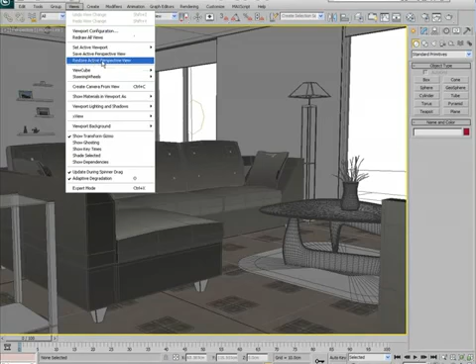So what we're going to do is take this scene and we're going to see how we can add a Final Gather to the global illumination in this scene. So let's go ahead and let's do that now. The first thing I'm going to do is come up here to the views menu. I'm going to hit save active perspective view so I can save out this view. Now if I go ahead and have a look, I can always restore the active perspective view and come back to it later.

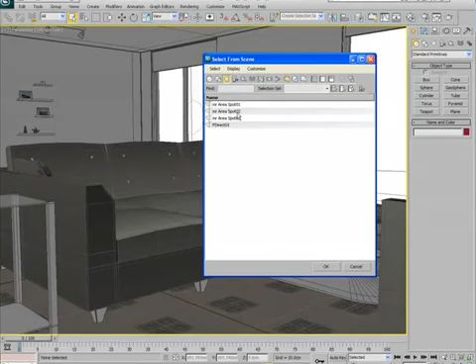Let me go ahead and hit H on the keyboard to open up the Select from Scene browser here. And if you don't already have the light filter set up, if you have your window here set up like this, simply hit the Display None button over here on the right and then turn on the light filter. That way we can only see the lights. So we have the 3 spotlights we created before. Let me go ahead and select spotlight number 1.

I'll go to the Modify panel, and under the Mental Ray Indirect Illumination Rollout, you notice that we have our manual settings right here down in the lower right. We have right now 2 million photons per light. That's because of course, as we've seen, when using global illumination by itself, you need millions and millions of photons to get a good result. Now when you combine global illumination and Final Gather, you don't have to use millions of photons. In fact, you can get away with just thousands of photons or hundreds of thousands of photons, which is a significantly lower amount.

So what we're going to do is reduce this from 2 million photons to only 200,000, which is going to give us a very, very small amount of photons and lots of splotching and artifacting in our scene, but that's actually okay. And you'll see in a moment why that is. So let's go to all of the lights, and let's switch all of them to 200,000 photons. There we go. Okay, so now all my lights have been reduced to 200,000 photons, which comes out to a total of 3 lights shooting a grand total of 600,000 photons in my scene. So I don't even have a million photons in our scene.

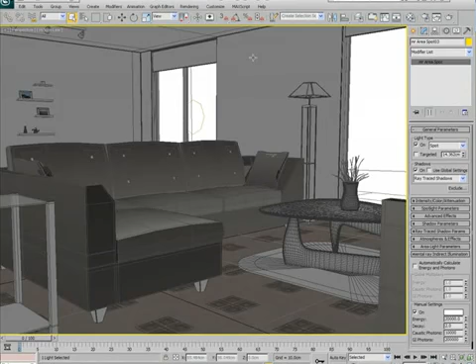Now let me go to the render setup window, and in the global illumination rollout here, I'm going to make a few changes. The maximum sampling radius is right now turned off, which basically means that it's on automatic mode, and Mental Ray is going to choose an ideal radius for my scene. Well, I don't want Mental Ray to do that, so I'm going to turn this option on to switch it to manual mode, and I'm going to choose about 2 units.

Okay. The other option I'm going to choose is optimize for Final Gather, slower GI. If you remember this setting, I skipped it in a previous video a long time ago and said I'd be coming back to it later. Well, now we need this option, so I'm going to turn it on, and you're going to see what that option does.

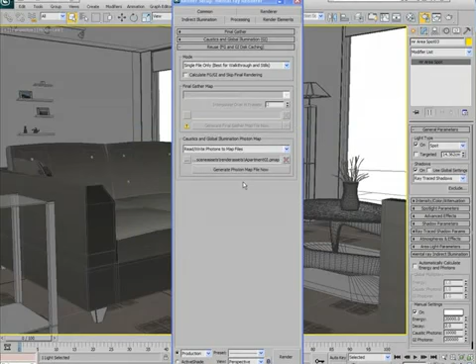Now let's close this rollout, and let's go down to the reuse rollout here, and let's create ourselves a photon map. So right now by default the photon map setting is set to off. That's not what we want. Let's go ahead and select the second option here, the read write photons option, and 3ds Max wants us to name a file here, so let's go ahead and call this photon map apartment GI. You can call it anything you want. I'll just call it apartment GI.

Okay, so now if apartment GI is set up, let's go ahead and let's do a render here. I'm going to turn off the UI here for the render frame window, just to take away some of that clutter from my 3ds Max workspace here. Okay, so the global illumination actually went by pretty fast. But you notice we get lots of splotching. That's because we're only using 200,000 photons per light.

Also, if we come up here, we'll notice that we're using the max sampling radius at 2 centimeters, or 2 units. Okay, that creates this splotching all over the place. But on the other hand, it also creates more accurate lighting. To get rid of the splotching, of course, we'd have to add more photons, but we're not going to do that.

We're going to use Final Gather. So let's go ahead and collapse the global illumination rollout here. Let's go to Final Gather and let's turn it on. I'll start off with a draft preset. I'm going to go ahead and choose a point density here of 1. That way I can have a good density of final gather rays.

Now for the rays per final gather point, right now it's set to 50, which is pretty low. Normally you'd have to go to a pretty high setting, more than 200, maybe even 500 rays for a final render. Now in my case, I can go as low as only about 128 rays. That's because I'm combining final gather with global illumination.

And when you combine the two, you can use less photons for global illumination, and you can use less rays for final gather. And as you can imagine, this is extremely useful and very important when you're rendering out using these two features together. Now I'm not going to use the interpolate over number of final gather points here.

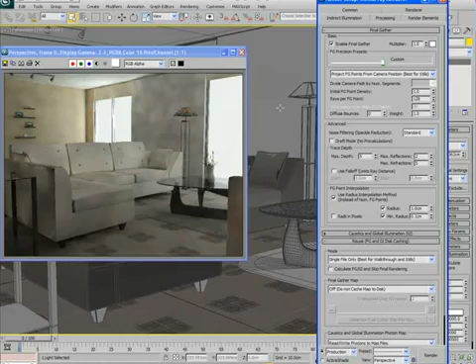Let me go ahead and close this render frame window. I'm going to hit T on the keyboard to go to a top view, and zoom in here a bit. And I'm going to go to Tools and use the Measure Distance tool. I'm going to measure the room here from the top left down to the lower right. That's going to give me a pretty good number to work with.

Now I'll go to the MaxScript here and open up the MaxScript listener, which is F11 on the keyboard for short. Now the distance is about 126 and change. So 10% of 126 is 12.6. I'm just going to go ahead and use 12. It doesn't have to be the exact number. Now for the minimum radius, I'll use about 10% of 12, which is about 1.2. So that's going to give me a pretty good interpolation solution there.

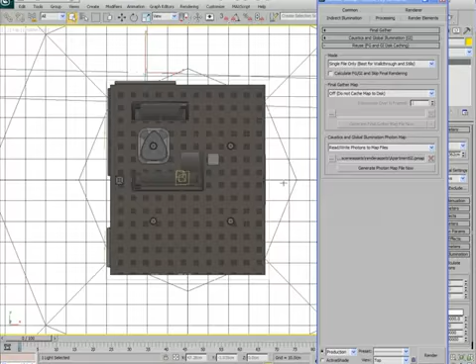Okay, now with that done, I'm going to collapse that. Down here, I could create a final gather map if I want to. At the moment, I'm not really going to. There's really no need to. You could if you want to, but I'm just going to leave it alone. I'll go back to a perspective view, and I'll go to Views and restore active perspective view to go back to this render position right here.

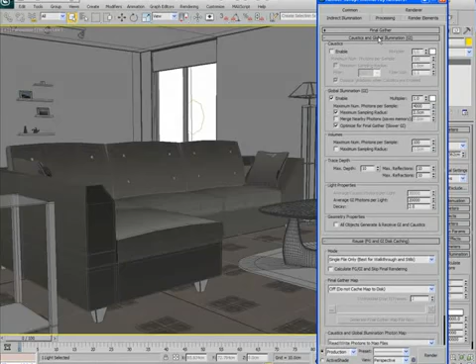So I have my photon map down here that I've already created, and I've set up these final gather settings the way that I like them. Next I'm going to render this out using final gather by itself without global illumination so you can see the difference. So let's go to global illumination and disable it so that we're only using final gather. Now let's go ahead and do a render.

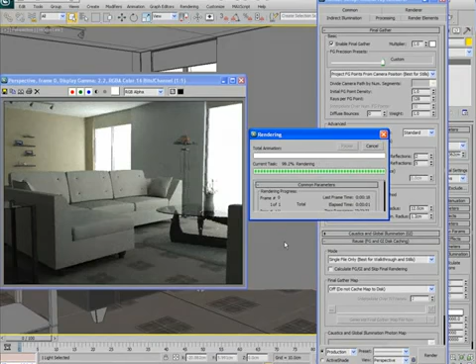Let me move this over to the side like this. You can see that the final gathering is going by pretty fast, and the reason is because we're only using 128 rays, which is actually a very small number. So you notice that it doesn't appear like there's any indirect illumination. It's very difficult to see the bounce lighting in the scene, and it's very dark, which is not exactly a good thing. Other than that, everything else looks pretty good.

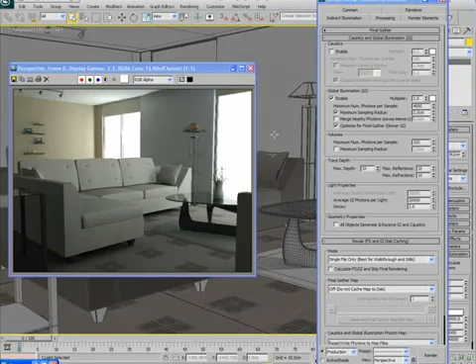Now I'm going to clone this image out and hide it for now, just so we can come back and do a compare and contrast later. Okay, now I'm going to turn on global illumination. So now I'm going to render out with both final gather and global illumination together, just so we can see the difference. So let's go ahead and render this out. I'll move this over to the side. And there we go, it's rendering out.

Alright, so you can immediately tell in the fast progressive feedback of the render frame window, the lighting looks completely different. It looks brighter, looks more natural, and materials just look a lot better than before. There's just this beautiful ambient lighting to the scene that looks fantastic.

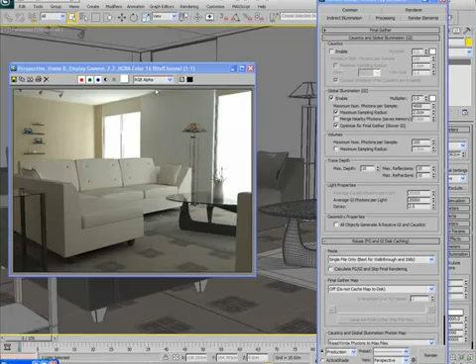And even though the render isn't finished, or there it goes, it's finishing up now, you can see that there's some beautiful detailed shadowing underneath the couch, something that we couldn't achieve just by using global illumination by itself. Final Gathering is able to come in and add those beautiful shadows and more accuracy and detail to the lighting in our scene. Now let me move this image over to the right, and I'll bring back the previous image that we rendered out using Final Gather by itself.

So on the left we have Final Gather by itself. It looks very dark. The environment lighting doesn't look that great. Even though we do have nice shadows, we don't have that nice ambient lighting in our scene. Now the image on the right uses global illumination